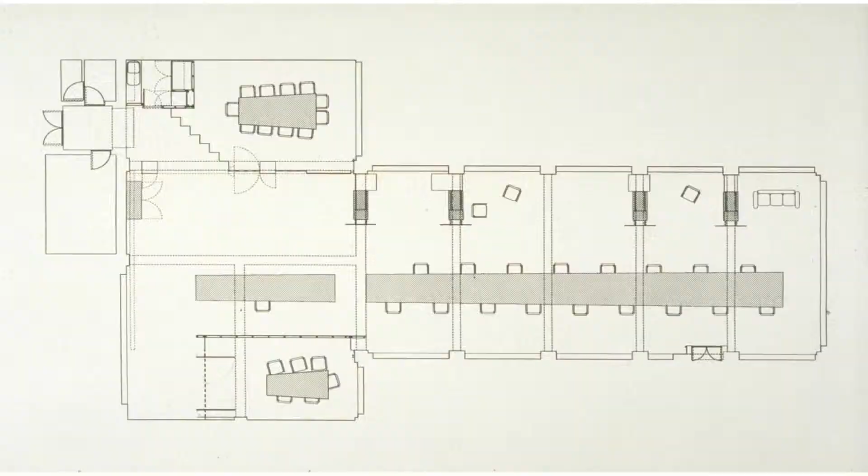The solution which Ralph and Simon came up with was to create a non-hierarchical table that everyone could sit at, with small meeting spaces and little breakout spaces. We had small library spaces down the side, meeting spaces, and the non-hierarchical table here, so everyone worked in a single space. 20 years ago, not many people were doing that. No one was really doing that. But the difference here was people really wanted to do it.

We moved on and started to develop with Tim a much bigger scheme. This is an agency called HHCL. Again, it was a much larger corporation. They wanted to work again, they wanted to work in a different way, and they worked in a fashion which allowed them to do that.

We introduced things which now look fairly dated, but these were just simple things like pigeonholes, where everyone had somewhere they could communicate. This was the days when we had our first internet connection, and me and Ralph used to sit there trying to trace the traffic flows in Los Angeles because we could. So that was the level of connectivity we had.

Everyone had their own little store, again not something common. We created little specific rooms - a padded cell where there was no sound if you wanted something private, and meeting rooms open to the sky with sliding roof lights. We learned very quickly that you never use an engineer who you meet in a pub, because he disappears when it sticks open in the rain.

We then moved on through a whole series of larger and larger schemes. We did things for Go Airlines, we did things with Omega. But this is the scheme which I think a lot of the ideas came together - this is Talkback headquarters.

They brought together 4 buildings on Newman Street. They pitched us against a D&B company, and the D&B company wanted to fill an atrium across here, saying you could have a lot more space if you filled that in. We said, hang on a moment, there's a lot going on here, you could do a lot more.

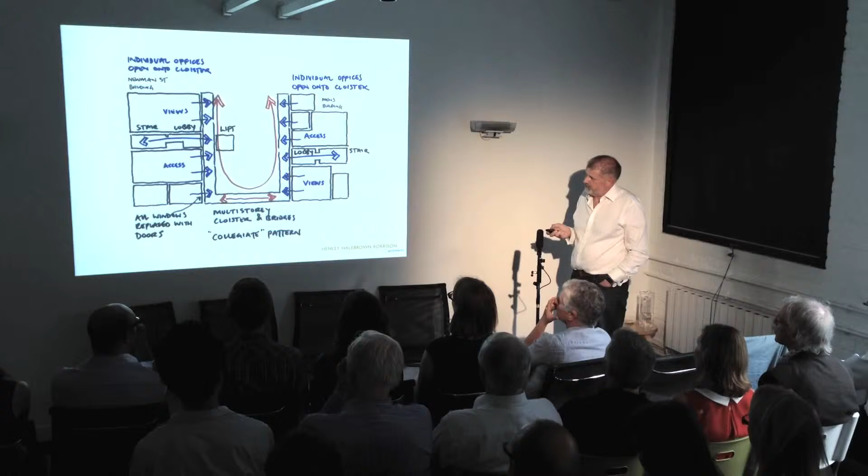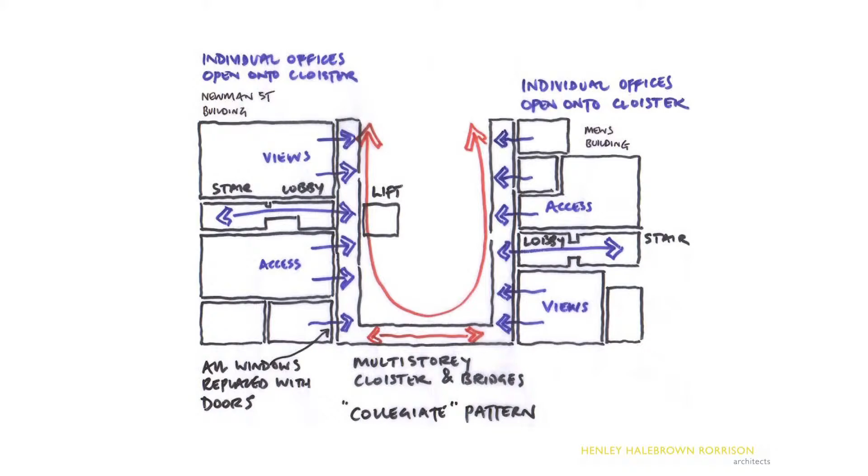In this building, they wanted to create a situation where they could sublet all these buildings and put all their staff by room, but still take these out as production offices. So we created a situation where we simply pared back all the windows, opening these onto decks, so we immediately got levels of communication here. We created access from all levels, and all these spaces became something they could sublet because they all had separate access. The ground floor, as Kirsten was saying, incorporated a lot of what Kirsten was saying.

So we had very small cell offices for the key staff, open plan offices when you wanted them, an external courtyard, and a kitchen common room. This sort of relates back to our table - it was a domestic type space, so the reception became a hall, double height. The building itself worked on the principle of natural ventilation, because you never need to be cool in London.

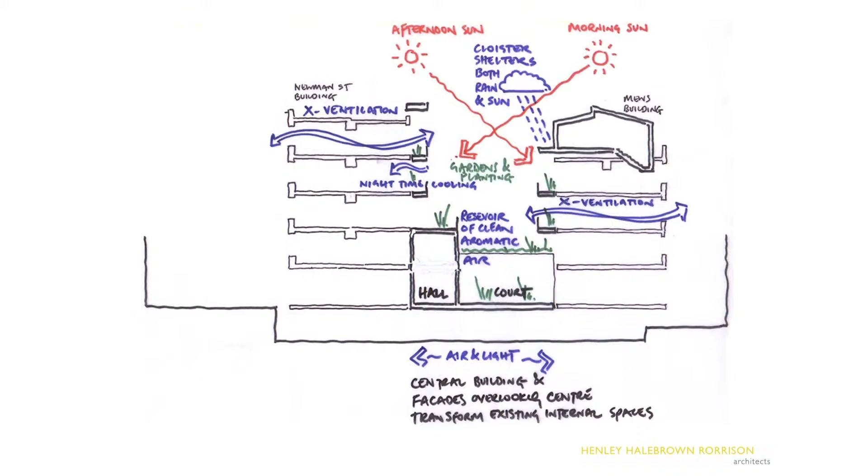We had a deep-set courtyard which we dug out, and all these spaces were sublettable, with the core staff kept down here. This is the building it produced - it produced a building where everyone seemed to feel at home and became a very, very well-liked space.

These people work in an industry with high salary, and they wanted an attractor to be in the office. This is where this office became really important to them. They have courtyards with light. Underneath here there are film studios, but you don't know because even they are naturally ventilated. Everyone can talk across these walkways and connect across here, but if they want to, they can actually shrink the whole business just to this core centre.

And it carried on, so this is 15 years later. It was planted, and they've looked after it amazingly well. One reason I include it, it's interesting that this has now, in the last year, been sold and converted into a hotel, but apparently very little has been changed in it.

It seems an ultimate in flexibility that if you can design an office properly flexible, you can use it for other purposes. So it does appear to be a truly sustainable building. We argue this building to be completely naturally ventilated. This was Talkback with Griff Rhys-Jones and Mel Smith, and I had a stand-up argument with Mel Smith and the agent, who said they had to put in air conditioning just as we'd let the tender. We said it was impossible and pointless. When we finished this building, the same agent came back and said they put a premium of 40% on it because of the design and uniqueness of the building over air conditioning. They got that back in their pockets because the three of them sold the building to Thames straight away, and that's what it ends up being. That's been published, fair enough. It was actually judged one of the European offices of the year, so it was well received and well visited.

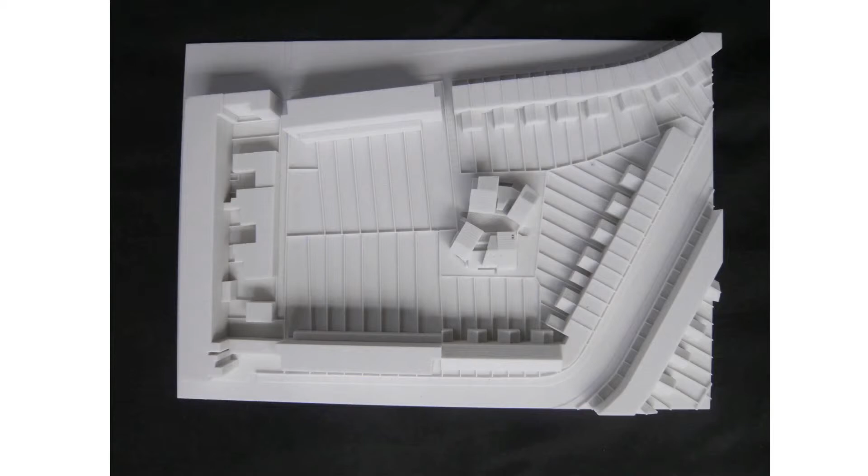This is maybe a jump, but this is a co-housing scheme which has just finished. I think it's quite interesting because again this is arranged like a domestic table, with a set of people who wanted to live and work together. This is a bit of a nightmare site - it's in the middle of Hackney, completely surrounded by very politicised people who felt they were going to have something stuck in their back garden.

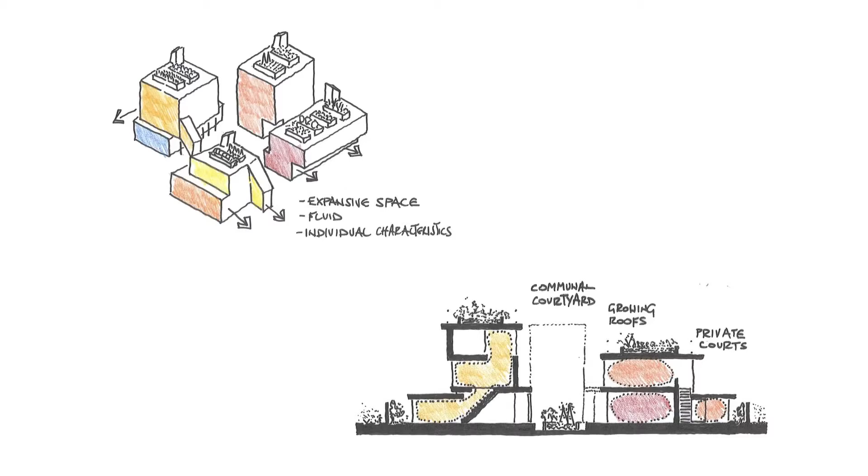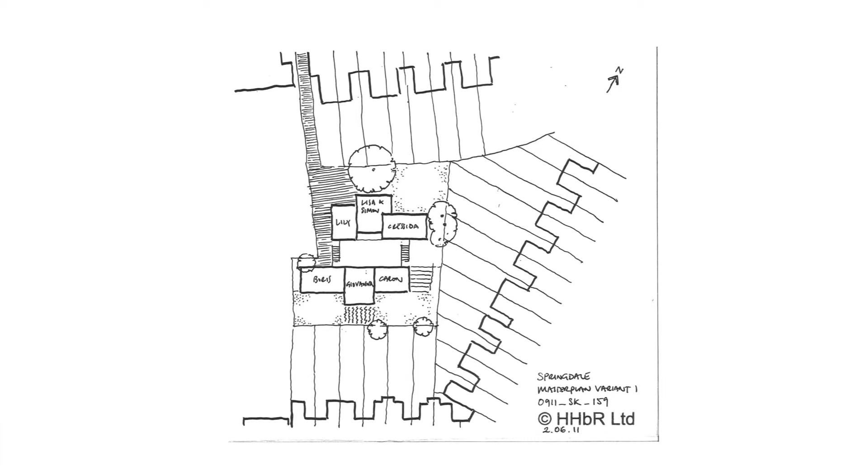We were challenged with this group of people - we've got 2 therapists, 2 academics, a designer, and an artist. They wanted individual places, but they wanted to live and work together. So this is maybe an extreme of how a workspace could be, much more than live-work, because they wanted to interact. As Kirsten said, there was a big thing about them wanting to interact but keep their privacy. So we end up with 6 little houses around our big table, so they can talk to each other across the table, but equally can turn their backs and watch TV if they want to. The plan became, this is the lowest level of the plan...

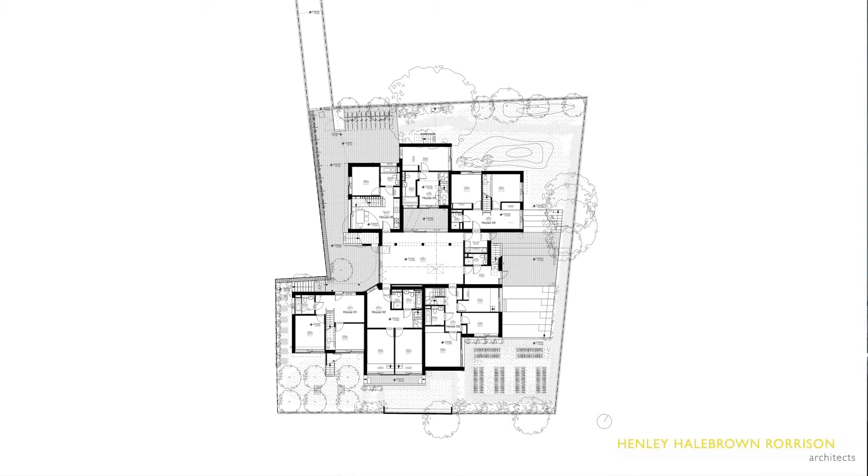What we ended up doing was creating the buildings - these are obviously the houses. This is a centrally shared space, a communal hall, with communal facilities like a laundry and a workshop. All the houses feed off this communal workspace hall, but they all equally have private entrances on the levels you go up. You enter down Copper Lane, down the shared entrance, and you can walk up. If you go down to the shared space you walk up into the private houses. Each private house has its own front door, which can be quite cut off - it goes across a walkway.

They've got communal space which, in theory, they're going to use as allotments around it. This is literally finished in the last - well, still in the final account, not quite finished but more or less finished at the moment. They have their rooms too - the therapy rooms are designed as therapy rooms, but they're part of their houses. They do actually live and work in those houses.

What I find interesting is that these kids are growing up in schools where they're working in collaborative fashion and individual fashion - used to working in cellular space and open plan space, finding things for themselves. These guys are growing up in a community working environment where they have to interact but can be separate. I don't know, and I have no research to back it up, but as these people get older they'll be a completely different generation from us, because they've experienced it almost from primary school. All the buildings we do relate back to that talkback scheme and right back to stuff we did with Ralph, about how people interact. Whether you can separate the office from work going forward, I don't know - I'm not the person who can do that research.